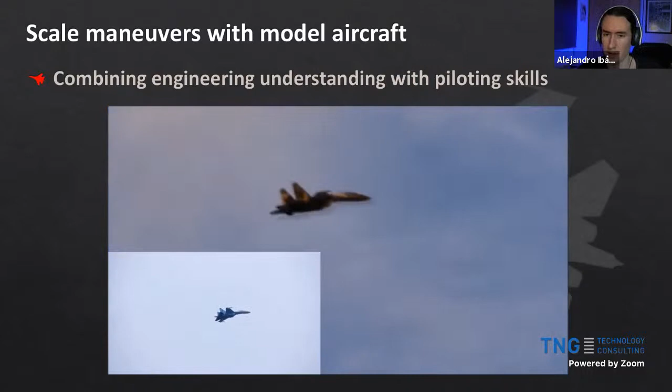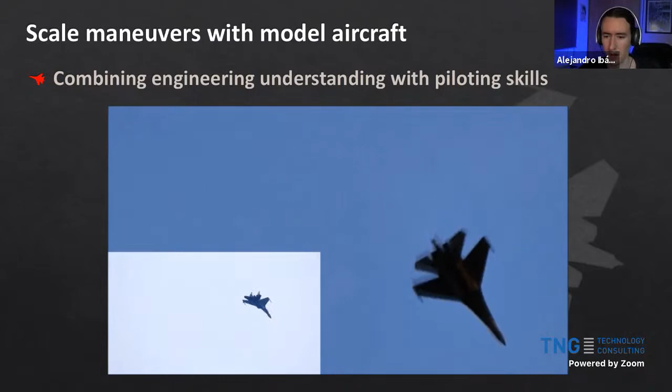So here, for example, you have in the small screen a video. Oh, by the way, all the media that you will be seeing in this presentation is taken from my YouTube channel or from my personal picture collections. So it's all filmed by myself or by my father. And what you're seeing here, this is my model aircraft, a small replica of the Su-35 on the big screen. And on the small screen, you have the real jet. And as you can see, they can be made to behave very similarly. Of course, there are some differences, and you need to slow down the footage of the model aircraft so that it looks realistic. But ultimately, they are more alike to each other than most people would think.

So what is the aim, what I really look forward to achieve in the talk today? So many of you may have already been to an air show, or at least you have seen fighter aircraft in movies or YouTube videos. But I think it really takes personally getting to an air show to experience this first person, to stand next to one of these machines, to really get amazed with it. And I would love in the future, if you attend such a show, or you see maybe the Top Gun movie that is coming up, you will see what these planes are doing, and not just be visually amazed, but also get a basic understanding of what is going on behind all this.

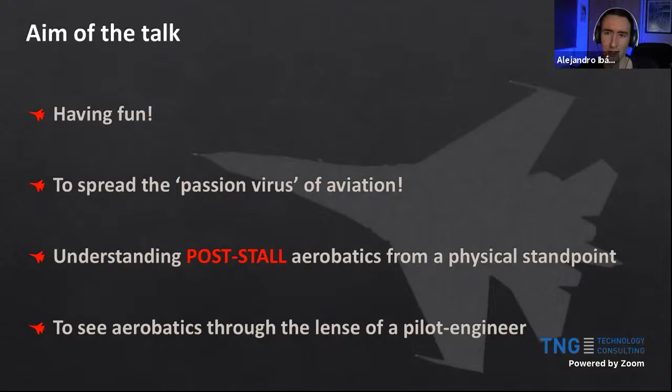And of course, let's have fun. And I want to spread the virus of passion for aviation. That's what this is all about for me.

And in order to achieve this, I have divided the talk in 3 main blocks. That is an introduction or background, in which I will explain how I came to be fascinated by this topic, and a brief discussion on the tools that we were taught at university in order to understand flight. Then we will move on to fundamental concepts that I think are necessary to understand the topic at hand.

And finally, the fun part, which is I've made a selection of very iconic extreme jet maneuvers, and we will be dissecting those. Then I'll make a few last remarks and move on to the Q&A.

And before we move on, first of all, I need to talk about what is a stall, because the title for the talk is Extreme Jet Aerobatics. But by extreme jet aerobatics, what I really mean is post-stall aerobatics. That is

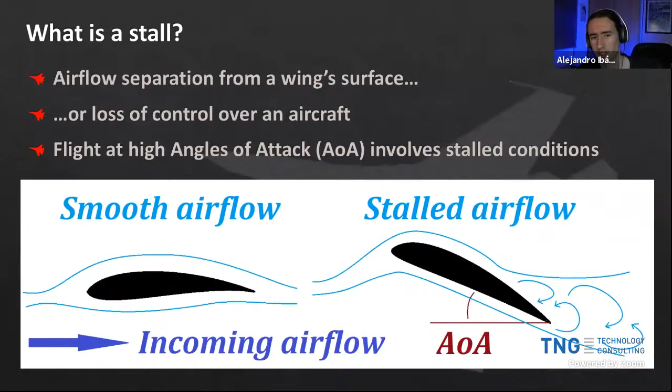a streamlined object moving through a fluid usually produces a very smooth flow. But as this object starts developing angle of attack, or alpha, as it's usually referred to in engineering, the flow has problems trying to keep attached to the surface of the object, and eventually it will detach. When airflow detaches from a surface, it creates all sorts of chaotic, swirly motions that, for the most part, one tries to avoid. And we will see why is that. So this is what stall is, and why is that relevant?

Well, post-stall aerobatics, as the name indicates, happen in post-stall regime, and most of the things that we are taught at university stop when stall begins. So all this talk essentially is going beyond university teachings in many regards.

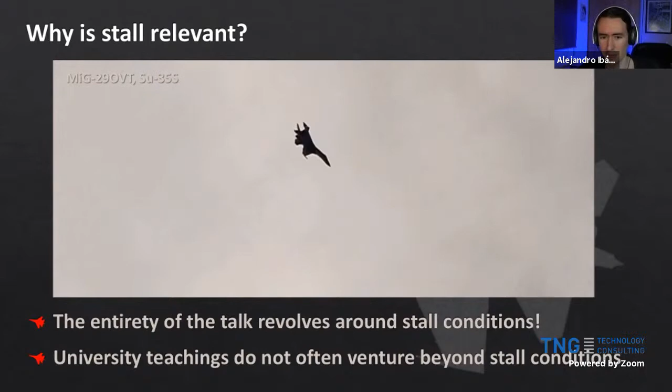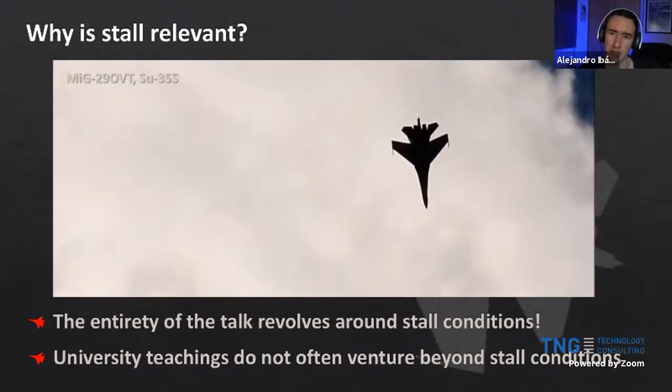Here you are seeing aircraft that are performing maneuvers in which the flow is practically entirely detached, but still these aircraft are able to retain control authority and keep flying. And without further ado, let's get started with the first block.

And I've titled this From YouTube to Engineering, and the title may sound a little bit weird to you, but it makes perfect sense. I mean, I was already playing with toys like small airplanes. Later on, I would go to video games on fighter jets as a child. But at that time, I was not really interested so much in aviation.

What really sparked my interest was when, as a teenager, I discovered videos of Russian aircraft performing seemingly impossible maneuvers on YouTube. That's where it all began for me. That's what really marked the difference from being just something that I knew about to being something that somehow I wanted to dedicate the rest of my life to.

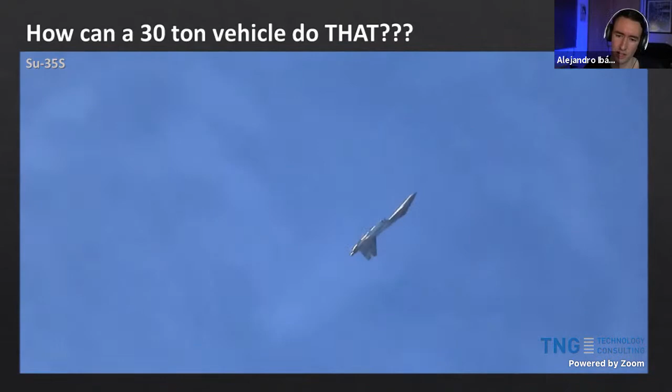Like, really, just look at what you are seeing here and try to wrap your mind around how such a huge aircraft is able to perform these kinds of maneuvers. Like, these jets are often in the 20 to 35 tons range.

Just so you get an idea, it's like taking 3 city buses, wrapping them together with duct tape, and then imagine these duct tape buses performing backflips at 400 kilometers per hour, plunging through the skies. Like, try to wrap your mind around that. I don't know about you, but for me, this is fascinating.

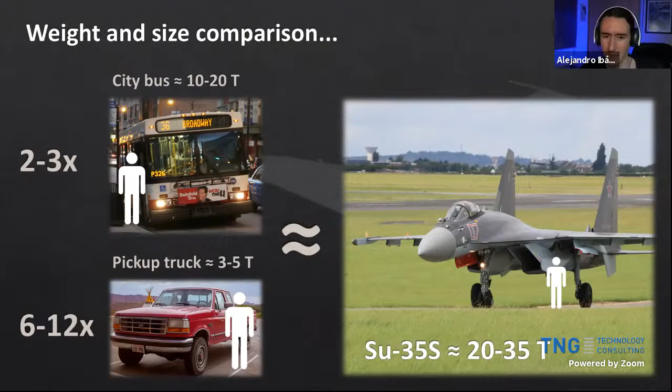Which leads us to university. This became such a passion, or even you might say an obsession, that I needed to know more about it. And I decided to enter an aerospace engineering degree in order to find out more. So actually, in fact, I was not able to enter an aerospace engineering degree directly because my qualifications were not high enough.

So I instead started with industrial engineering. I then repeated the access tests, and then I managed high enough qualifications to be allowed in. So, hey, I'm in. Now I will get the tools to get the answers that I have been craving for, right?

Well, not quite. I mean, I was expecting university to be hard, but I was also expecting university to deliver much more straightforward answers. They certainly delivered me many tools, but the answers as such to the questions that I was asking myself, they did not come forward as easily. Individuals that are knowledgeable on this topic are really hard to come by.

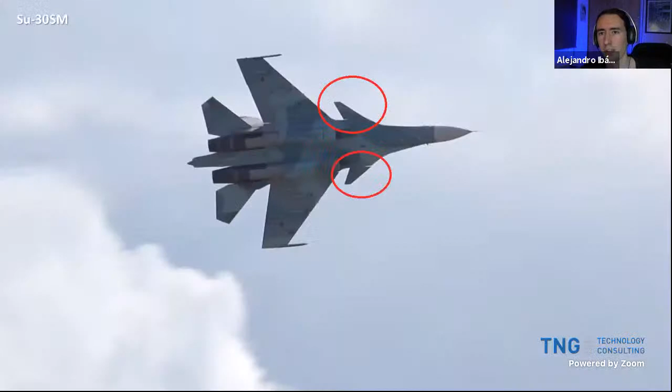The subjects didn't touch very much on these aspects in a deep way, and professors, for the most part, lacked answers. They were very knowledgeable, of course, in their respective fields, but many of the questions that I would ask them, they would just have no answers for.

Here, for example, we're seeing the Su-30 SM. This is a Russian airplane, and you can see highlighted in red are what are called canards. And I saw many planes use this, many didn't.

And one of my questions was, well, what are these for? I mean, I more or less get an idea of what they can be doing, but why would you mount them on some aircraft and then not on some other?

And I asked this to my aerodynamics teacher, and with all honesty, credit where credit's due, he just told me, I don't know, because he could have made anything up, and maybe I would have been okay with that. But since he did not give me an answer, that kicked me on my own spiral of research to find out more about the topic, which eventually I think led me to a deeper understanding on the subject.

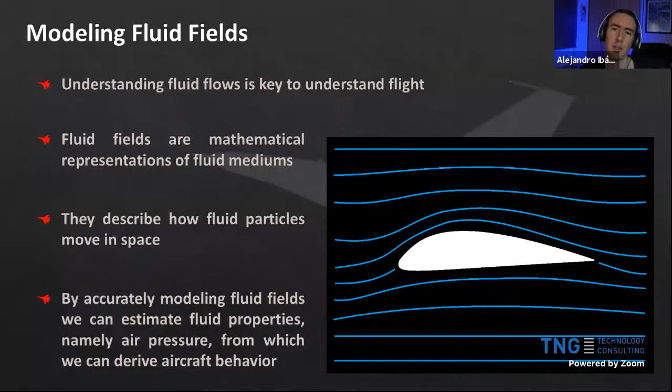So this is all about modeling fluid fields as far as the university part is concerned, right? If we want to understand how an aircraft is flying through the air, we need to understand how the air behaves around the aircraft. And from being able to accurately model the behavior of fluids, we can derive properties such as velocity and pressure, which will give us clues as to why things are happening.

And there are three main tools that we are either taught or at least presented during university. The first one would be potential flow. This is what is understood as classical aerodynamics, pretty much developed in the 1920s, but still relevant today. And this is an analytical method, heavily based on mathematics.

Then we have computational fluid dynamics, very commonly known as CFD, which more or less was developed about the same time, at least the foundations, but it only became readily available for use later on because we did not have enough computation power back in the day to make use of this tool. And finally, we have empirical research, that is to make a scale replica of what you are trying to research and test it in a wind tunnel or by other equivalent means.

Now, so what is potential flow? Here, I would like to make a comparison that for many physicists and engineers is very relatable. We are taught that you can represent any sort of wave through superposition of simpler waves, like sine waves. This is what is called the Fourier transform. And this is extremely useful, right? Well, for potential flow, there is a very similar thing going on. You can take simplified and elementary flows, and you can put them together and represent more complex fluid fields.

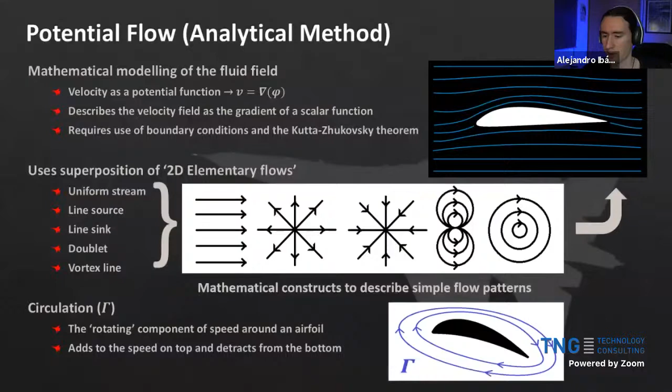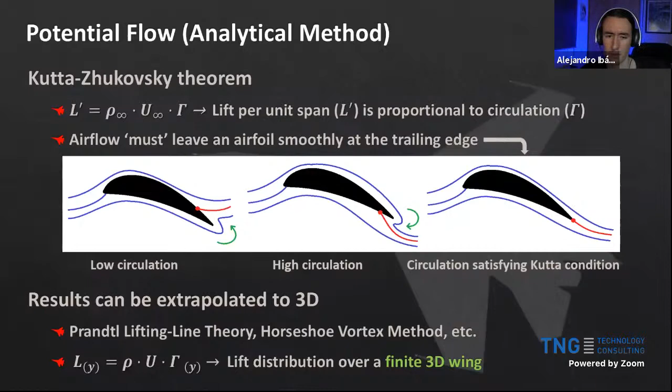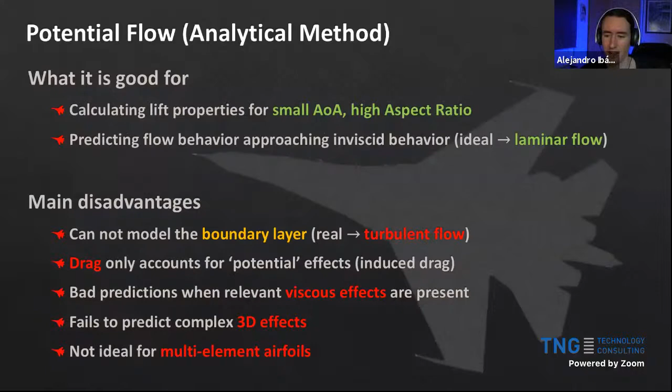You could virtually represent pretty much any fluid field around an airfoil. But you need to start specifying conditions so that it's not just an arbitrary result, but one that approaches reality. This is what is called the Kutta condition. And basically what you need to understand is that it forces the fluid to exit smoothly at the trailing edge of the airfoil. Then all this can be extrapolated to 3D through further methods like Prandtl lifting-line theory and others. So potential flow is fantastic for study of wings at small angles of attack, but again, we are going to be using really huge angles of attack in extreme aerobatics, so really not useful in that regard.

Which brings us to the next one, which is CFD. This is a numerical method based on the Navier-Stokes equations. That is essentially Newton's second law applied in a fluid context. What you do here is you discretize space in a number of control volumes, and then you try to solve these equations that describe the behavior of fluids for each one of those control volumes. And there are different numeric approaches to solve this.

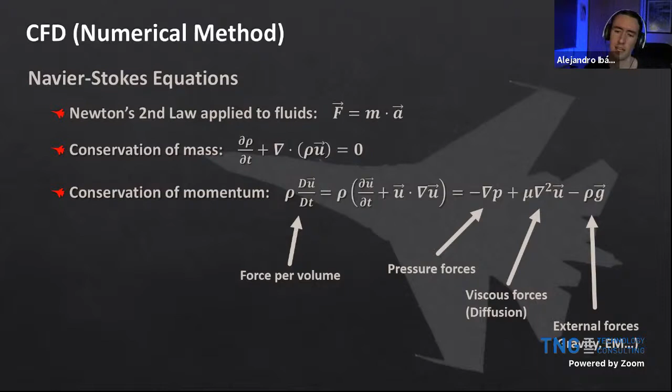But the thing is, the Navier-Stokes equations are some of the most relevant equations from the 19th century. And essentially, as I said, it's Newton's second law, force equals mass times acceleration. And when applied in the context of a fluid field, you have this force per unit volume essentially broken down into pressure forces, forces of viscous origin, and external forces like from gravity or electromagnetism. And once you simplify these equations for the case that would apply to an aircraft, that is an aircraft flying at subsonic speeds, for example, this is incompressible flow, so density remains constant.

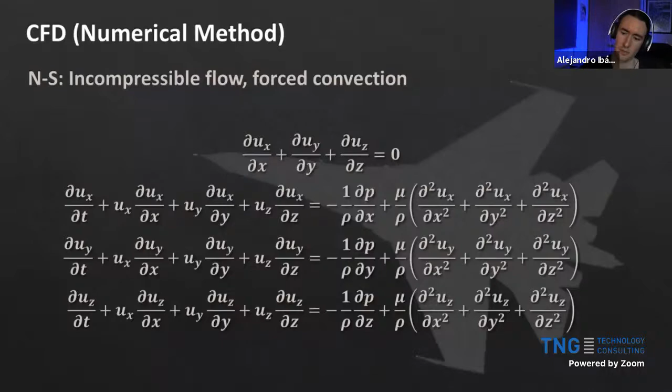And other simplifications, you still are left with a set of pretty heavy partial differential equations, which is what you can see now on the screen. And of course, you do not have an analytical solution for those, but you can make numerical approximations. That's why this is a numerical method.

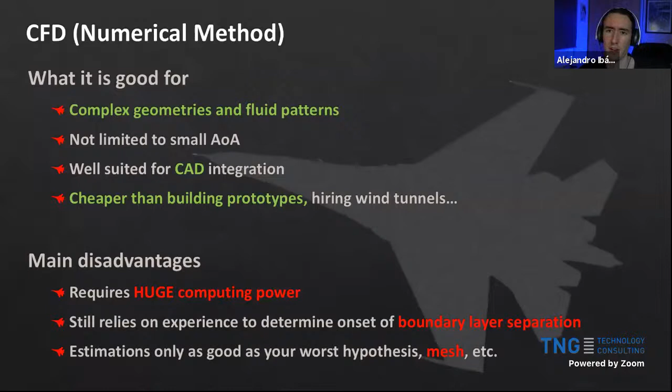CFD allows us to tackle much more complex problems, so to speak, but it requires huge computing power, which is one of the drawbacks, but it also is still difficult to tackle the problem of boundary layer separation. That is when stall happens. You need to contrast your CFD results with those of empirical research in order to really have accurate predictions,

which leads us to the last one, which would be empirical research, which would be really the best tool we still have nowadays to understand fluid motions. But it's crazy expensive. The installations you need for a serious wind tunnel are huge. These are huge buildings. It's not something you will build in your room. And even then there are drawbacks.

You need to take things into account, like you can scale down a model, but you cannot scale down air molecules. So you need to apply some correction factors so that what you're witnessing at a smaller scale will apply also to the larger one. And also model aircraft can be used in that regard.

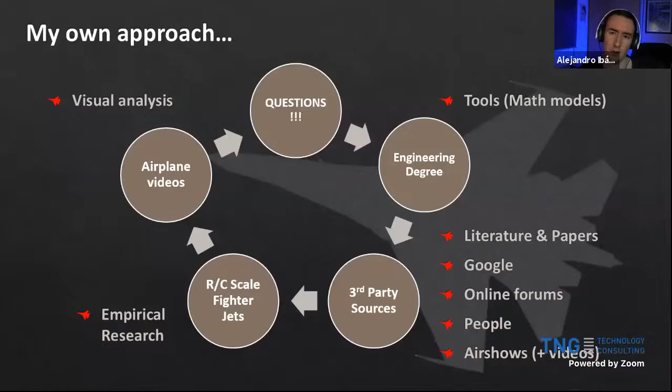So in essence, I had a lot of questions. I entered an engineering degree, which gave me tools, but for the most part did not answer those questions. And I went to third-party sources. I researched scientific papers, literature. I went to people that knew something on the topic, online forums. Then I was able to experiment with my own fighter jet model aircraft. And through analysis of videos, both of my jets and of the full-scale ones, I was able to learn a lot. And here I will start the second block, which is fundamental concepts.

First and foremost, you need to understand what each axis is called, because I will be mentioning this quite a few times. So yaw is like the steering wheel on your car, when you go to the left and right, this is what is called yaw on an aircraft. Then you have pitch, which would be to nose up or nose down, pitch up, pitch down. And roll would be balancing around your longitudinal axis.

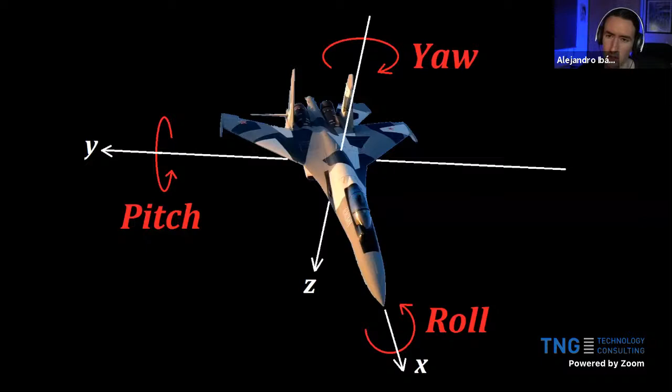And here, let me get back to airfoils and fluid fields, because it's interesting to note that we are not going to talk supersonics. Supersonics are a whole different topic, and when a fighter aircraft is performing the maneuvers that I have been showing here, it's not flying at supersonic speeds, because pulling those maneuvers at those speeds, the pilot would die and the plane would blow into pieces. It just does not happen.

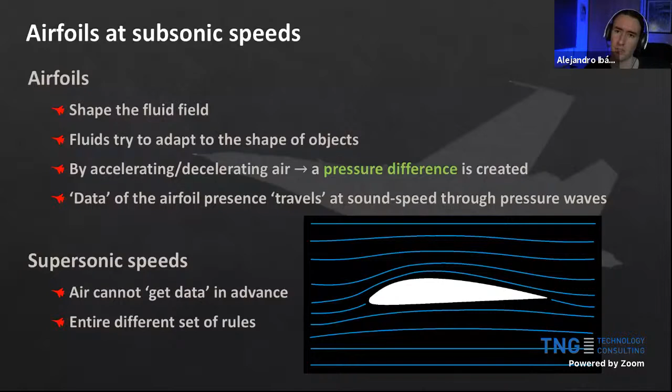So we will focus on subsonic, and at subsonic speeds, you need to think of airfoils moving through air as warning air in advance. So the air knows that an airfoil is coming before the airfoil gets there. A way to think of this is that the presence of the airfoil, this data is traveling through pressure waves, just like our voice would do at sound speed.

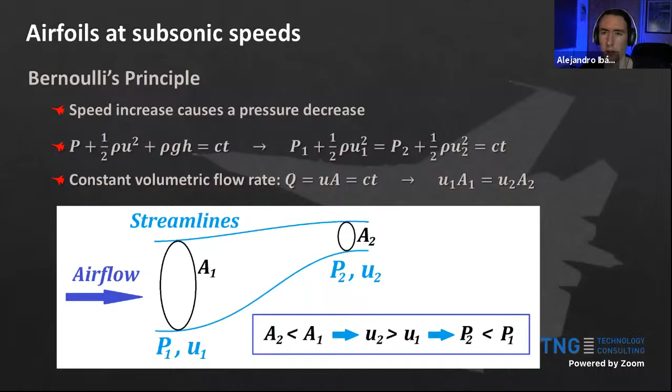And to understand how lift is produced, we have Bernoulli's principle, but long story short, what you need to take from here is that as long as the fluid behaves in a smooth and streamlined way, basically the fluid particles are moving along the streamlines parallel to them. So a constriction in area produces an increase in speed, and an increase in speed through Bernoulli's principle brings a decrease in pressure. So this is what dictates the distribution of pressure around an airfoil, and all the aerodynamic forces result from this.

Then we need to talk about what boundary layer is. Real airflow is viscous, so the air has some viscosity to it, and it is sticky. It wants to stick to things. So when you have a body moving through space, air is trying to attach to its surface. Or if we see it from a fixed perspective, like you would, for example, in a wind tunnel, the airfoil is fixed and airflow is moving around.

You can see that the airflow has an energy because it's the one moving, and then it loses that energy through viscosity and shear stress as it approaches the surface. And the space where this is happening and the fluid is losing speed is what is called the boundary layer.

And once the boundary layer loses enough energy, a phenomenon can happen, which is flow reversal. Fluid likes to travel from high pressure to low pressure zones. You probably know this from weather forecasts, right? Well, in an airfoil, sort of the same happens.

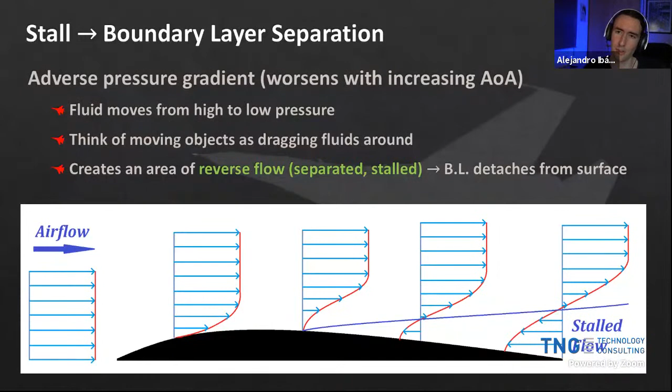So as the airflow moves along the airfoil towards the trailing edge, the pressure has increased. If it has increased high enough, then the flow will reverse and start flowing from the trailing edge to the front of the airfoil, and this causes the airflow to separate. This is essentially stall, and it gets worse as the plane increases angle of attack.

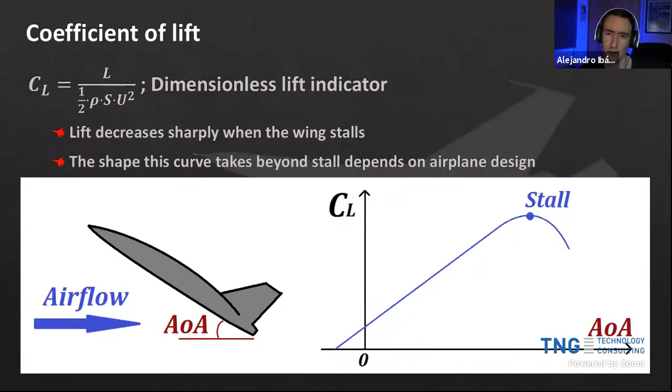So here you see coefficient of lift, which is directly proportional to the lift that an aircraft generates. For the first angles, this increases linearly, but then when stall happens, it drops sharply, and you stop producing lift, which would be the component of force that is perpendicular to airflow, the one that keeps you flying, essentially.

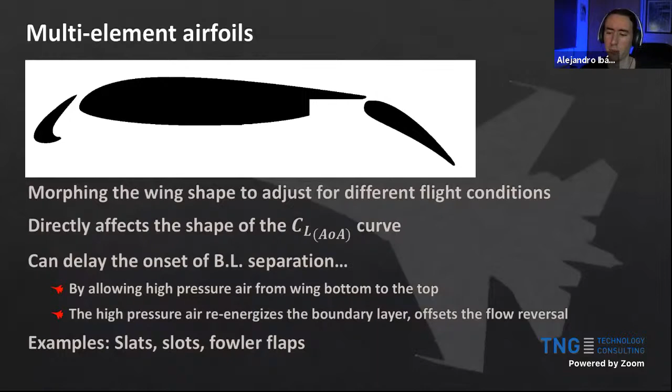There are many ways in which an airfoil can shape and form in order to try to improve this and delay stall. One typical thing that airplanes do is to allow high pressure air from the underside of the wing to the top by making gaps. What this does is you are infusing fluid that has high energy from the high pressure into the part of the airflow where it's starting to slow down, and then you give it a little more speed and can delay stall.

And a quick note, so far I have been talking about stall as a separation of fluid, but from a pilot's perspective, you need to also understand stall as a loss of control over an aircraft. The two conditions are often related, but they are not exactly the same. You can have an airplane that has separated flow, but has not yet reached the point where the pilot lacks complete control over it. And this leads us to how airplanes are controlled.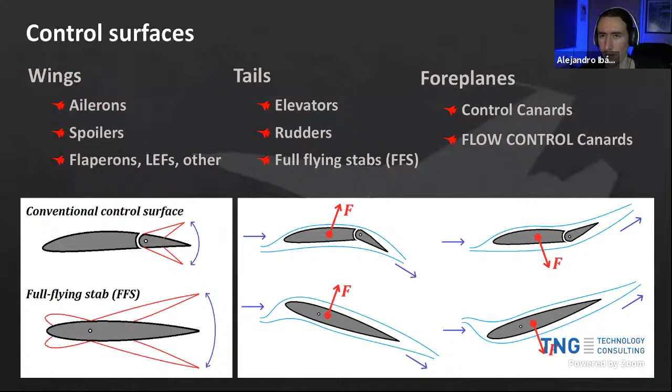So essentially the airfoils can often move. On the bottom left corner, you can see a conventional control surface, that is, the airfoil is fixed and the trailing edge can deflect up and down to change the pressure field and the forces that are generated. Immediately below, you have a full flying stab, that is, the whole airfoil will pivot around an axis. One way or the other, you're redirecting flow upwards or downwards. So mass times velocity, you are changing the momentum of airflow, and by reaction, the air is also conveying momentum to the aircraft in the opposite direction, so to speak.

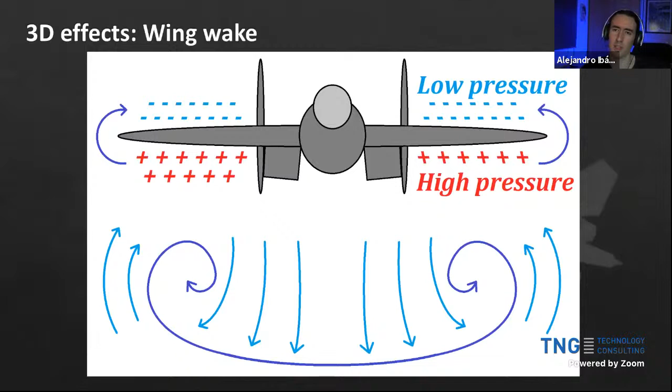Right underneath, you can see the typical shape that the wake of an airplane takes. It is very easy to remember, because it's a happy face, right? It's a smiley. You have two eyes, which are the vortices, and a smile. From this, you can easily picture what is happening to the airflow. It's going up on the outward portions where there is no longer aircraft, and on the inside, it's going down. This is very, very relevant.

Here, for example, you're seeing one of my model aircraft of a JAS 39 Gripen, and I have attached smoke cartridges to the wingtips to see these patterns being formed. And you can sort of see that happy face in there.

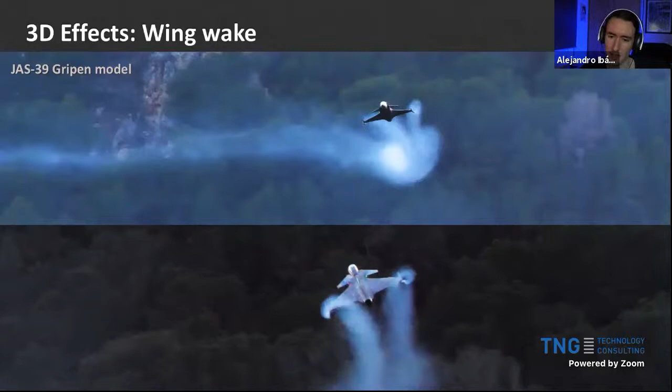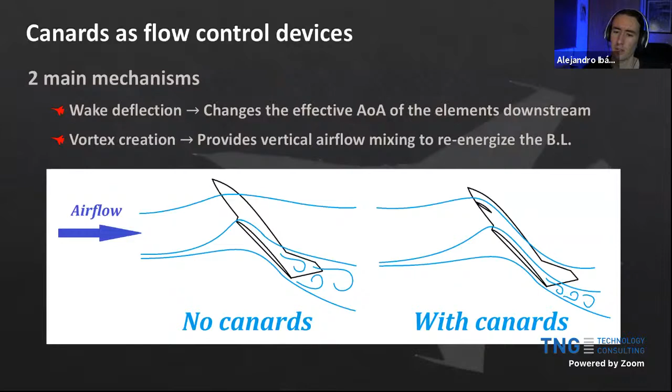And this is important because you can use canards. Going back to what I was explaining first, what are canards for? On an aircraft that does not have these canards, the stall will begin sooner as you increase angle of attack. But adding canards is akin to using a small wing ahead of your bigger wing.

And by doing this, you are doing two things. You are deflecting the wake, so the canards are changing the effective angle of attack that the main wings see. So the main wings suddenly do not see the airflow as coming from straight ahead, but with a shallower angle. So this already helps in delaying the onset of stall.

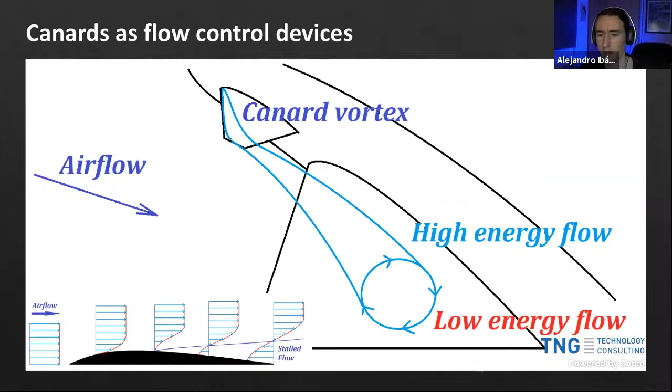So if you induce a circular motion here, you can bring that airflow that has a lot of speed in contact with the surface. So you are, again, putting energy where energy is bleeding off, and allow these airplanes to perform better.

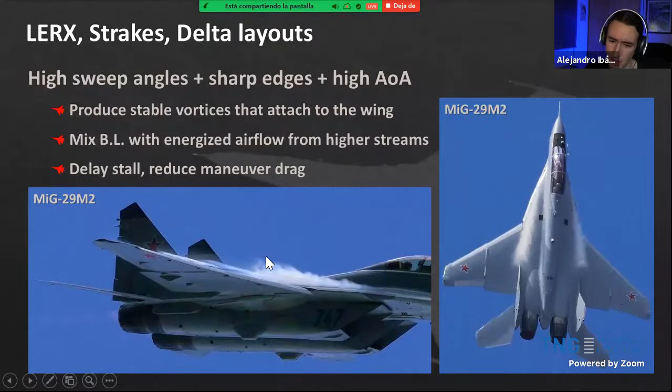Now that we are getting into the thick of it, it's interesting to understand what happens when you do not have a streamlined object, but a blunt one, like a cylinder or a plank. Airflow no longer behaves smoothly because airflow has a problem keeping its pace around sharp corners. So vortices will shed, and the airflow will detach from the surface.

And as we have seen, this can be put to good use to improve the lifting conditions of an airfoil. But for a cylinder in particular, you can have these vortices interact with each other in a periodic fashion. And this leads to oscillations and vibrations, which is something you definitely do not want on an aircraft because it can be destabilizing. And a plank pretty much behaves in the same way.

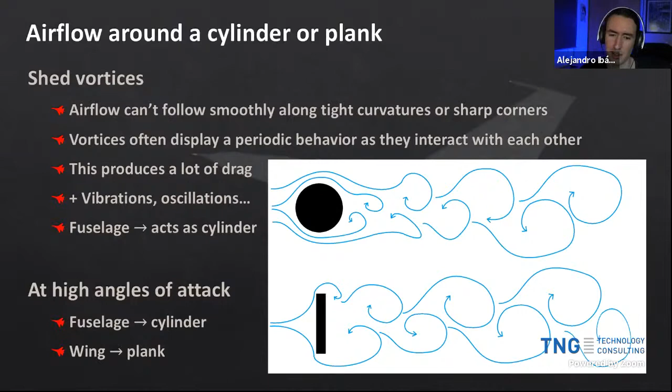And another thing that I want you to understand is that as a plane speeds up, it requires little angle of attack to produce lift. And the slower it flies, the more angle of attack it needs to produce the same lift.

And now is where the fun part really begins, which is modeling flight dynamics. At university, we are often taught about the 4 basic forces of flight, that is thrust, pushing you onwards, drag, the aerodynamic drag that is holding you back, the lift that will allow you to fly in the air. And then you break this down into even more complex systems, like you will break down lift into the lift of the tail on one end and the lift of the wing on another. You will also do this as a lift plus a torque applied to them.

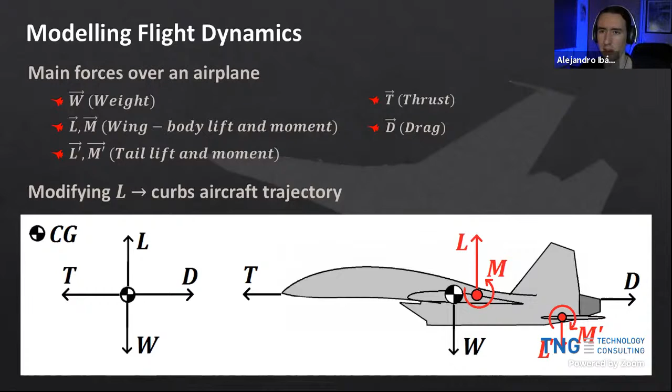And this is fantastic for modeling things mathematically because you can make a bunch of simplifications. But this is not visual, so this is not what I'm going to do here. Instead, I want you to picture forces around the aircraft in a different way. I want you to see that basically, ignoring thrust, we have just two main forces, that is gravity forces and

aerodynamic forces. Gravity forces, by definition, act on the center of mass of an airplane, so they cannot cause rotation over the body. I mean, in space, there's such a thing as tidal locking, but that's way out of the scope and pretty much not applicable to atmospheric aircraft. So forget about that. Gravity forces will not cause an airplane to rotate by themselves.

What makes an airplane able to rotate is the distribution of pressure, which we can take as a resultant force, which here I have painted as F, applied on a center of pressure. So if the center of pressure coincides with the center of mass of the aircraft, then there's no torque being exerted and the airplane will fly straight.

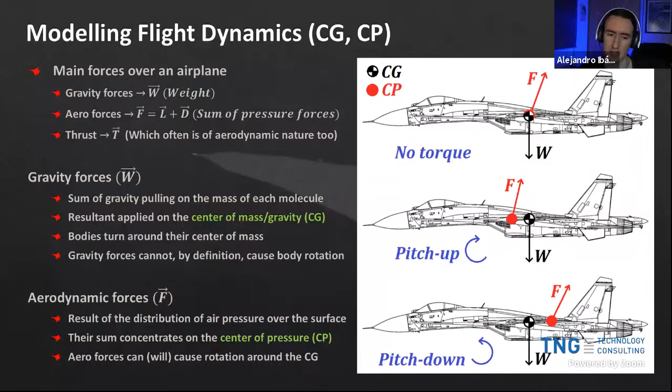If the center of pressure is shifting forward of the center of gravity, then the plane is going to pitch up, and conversely, if it shifts aft, the plane is going to pitch down, right? Force times distance exerts a torque, and the body will rotate around its center of mass. So with this in mind, it's much easier to begin to understand how these aircraft performing extreme maneuvers behave the way they do.

And I don't know if this picture I made here is really easy to understand, but I will try my best. So here you're looking at an aircraft with like a 45 degrees angle of attack that is coming straight at you. And you have the center of gravity, which is always at the same point. And what is happening is that this aircraft is deflecting its control surfaces. Like in this case, it would be canards on the front and tail planes on the aft.

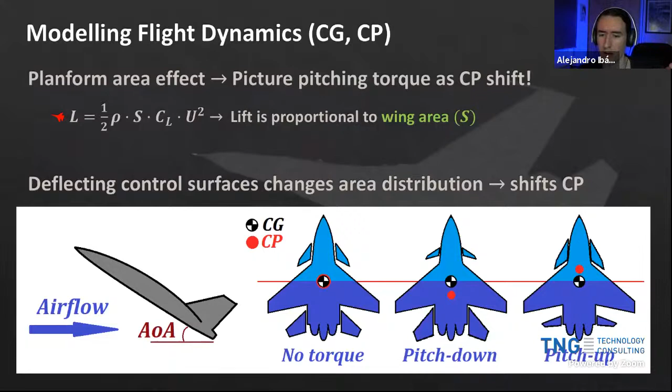And there's many things that affect lift, but surface is one of them. And you can picture a plane when it's reaching extreme high angles of attack. When you are deflecting control surfaces, what you are essentially doing is changing the amount of area ahead and behind the center of mass. So by making more or less area, you are moving the center of pressure. And as we talked earlier, shifting center of pressure means we can steer the aircraft around, like making it go up, making it go down.

And so far, I have thought about controlling the aircraft with conventional controls, but to understand extreme aerobatics and post-stall maneuvers, we need to talk about thrust vectoring. So even before thrust vectoring, understand that thrust is a force, so it will act on a line. And if this line intersects with the center of mass of an aircraft, essentially the plane is going to fly straight. If it does not, then it is also causing a torque that needs to be compensated.

And some aircraft engineers were smart enough to see that, oh, well, actually, we could use this to our advantage, because when a plane stops flying at speed, we lack the ability to control this airplane with enough authority from conventional controls. So instead, you can move thrust around, like pointing the direction of the thrust vector, hence thrust vectoring, to cause a torque that is allowing you to move the aircraft. And in the video, you saw a Su-30SM that is pushing up and down on the stick, and you can see how the nozzles are moving in addition to the tail planes.

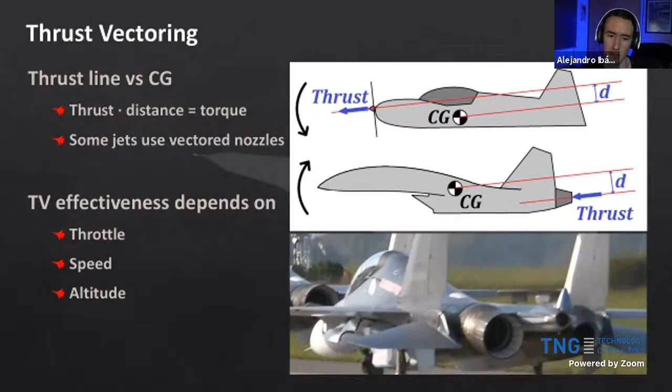This is a close-up of what nozzles such as in a Su-30SM aircraft look like when inspected close-up. You can see that they can deflect quite a bit. And there are many types of nozzles. Essentially, you have one-dimensional nozzles where they will go up and down. Then you have two-dimensional nozzles where they go up, down, left, and right.

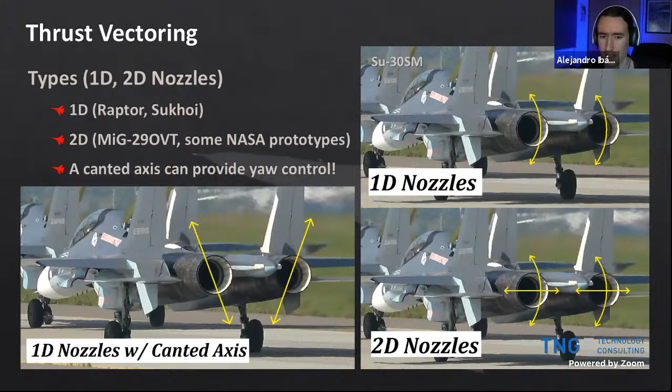So on typical two-engine aircraft configurations with 1D nozzles, that is the top right picture, this allows you to have pitch and roll control over the aircraft when you would otherwise be deprived of effective control. Then if you have 2D nozzles, you also have control over yaw. But Russians devised a very smart way to get rid of the second axis, which essentially means saving weight on the aircraft by removing actuators.

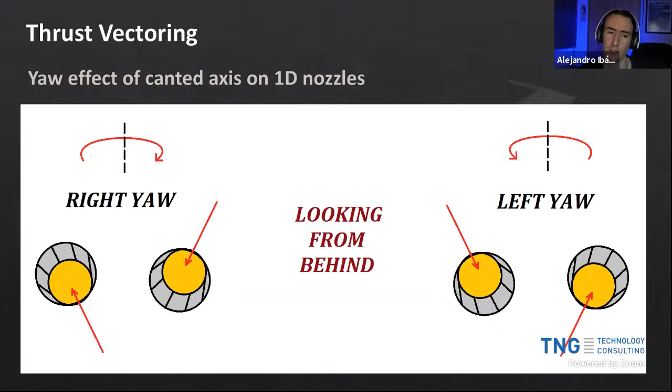And that is to tilt the axis at which one-dimensional nozzles actuate. So for example, if we break this down in forces, this would be like looking at an aircraft from behind, and the orange would depict the force that is being produced by said engine or nozzle, and this is broken down into two components, one vertical, one horizontal. The vertical is going to produce a roll moment, and the horizontal is going to produce a yawing moment. So you still get control over the three axes with help from flight computers.

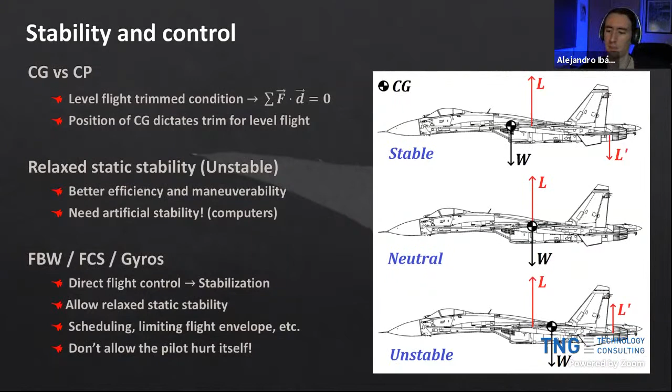And I am running short of time. So here I could talk about stability and control, which is also very relevant, but I'm going to skip it because we will not have time.

Let's start here the third block of the presentation, which is really what we were here for, which is to discuss extreme jet aerobatics. And the first one I want to talk about is sustained high alpha. So here you're seeing, again, a Su-30 SM. This one has the whole thing. It has canards, it has tailplanes, thrust vectoring, flaperons, rudders, and you were seeing it performing a sustained flyby at around 70 to 80 degrees angle of attack.

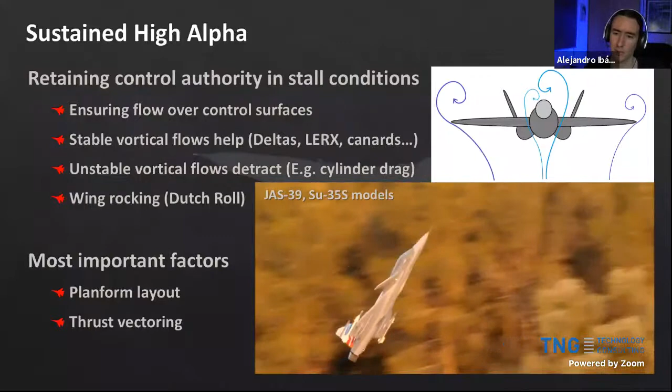Now, in this other video, this is me flying some of my model aircraft, replicating more or less the same moves. One thing that needs to be understood, this is a very difficult maneuver because, as we said, in these conditions, the airplane is starting to behave more like a plank and less like a streamlined object.

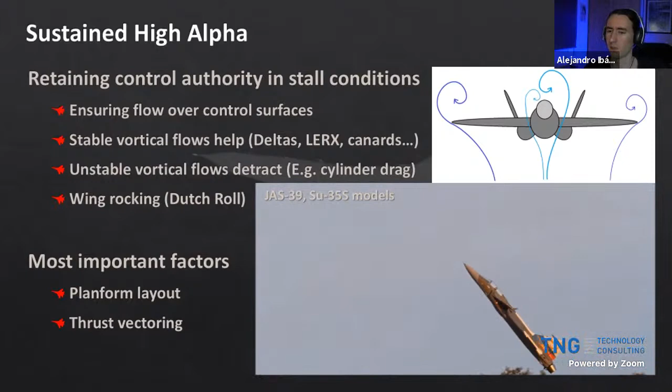And if you see the top right image here, you can see an airplane from above. And if it is flying, say, at 90 degrees angle of attack, completely perpendicular to the airflow, it's going to shed vortices. So the fuselage is like a cylinder, the wings and the rest of the aircraft are like a plank. And these vortices may not be shed in a homogeneous fashion, but they may alternate in strength. If you look closely here, you can see that my aircraft is tilting to one side and the other as a result of this.

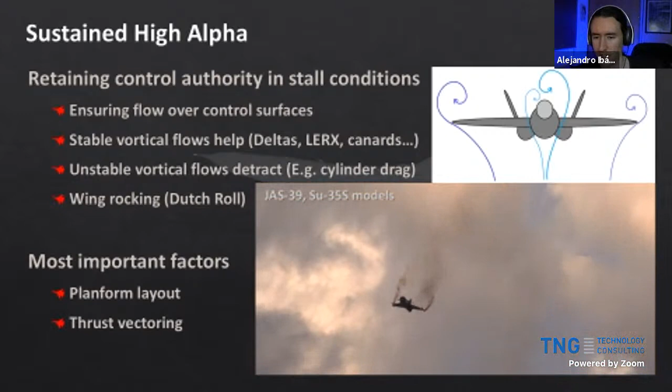There are a few more examples here that are pretty visual and make it easier to understand. So to be able to hold control of an aircraft in such conditions, you really need to try to ensure, here, one second, look here. Here you can see the vortices alternating between left and right, which is a problem that needs to be overcome.

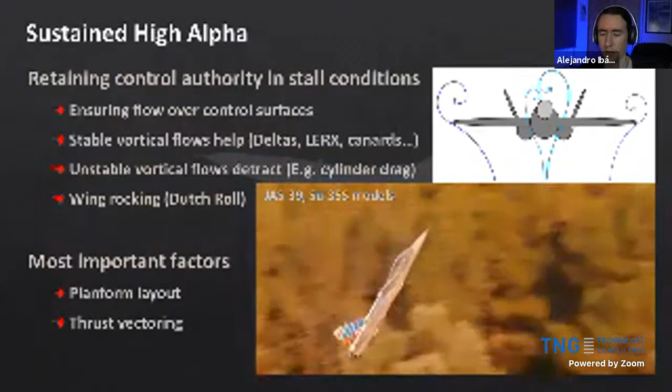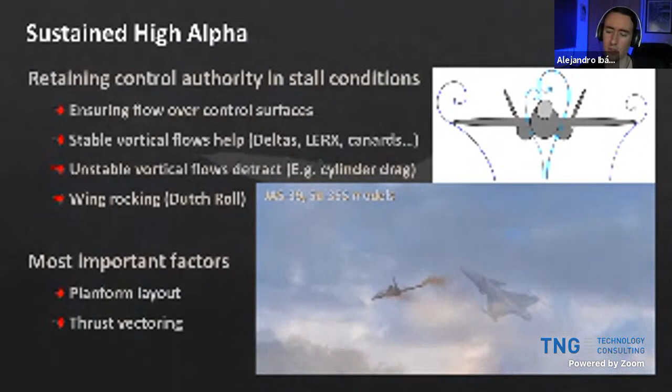And there's also what is called Dutch roll, which comes, we could say, from a potential origin, but it has much the same effect, and both can add up. And so here, thrust vectoring is pretty much the key solution to keep the plane in control, because control surfaces are almost deprived of authority.

And another maneuver, this is pretty much the first extreme aerobatic maneuver that one thinks about, which is the Cobra maneuver, or Pugachev's Cobra. So essentially the plane is flying straight, then it pulls sharply to 90 degrees of angle of attack or even farther, and then the nose comes back down. And through the entirety of it, the airplane retains forward motion. The previous video was a real MiG-29. These are my model aircraft. And as you can see, you can replicate the maneuvers of the big scale aircraft with smaller models.

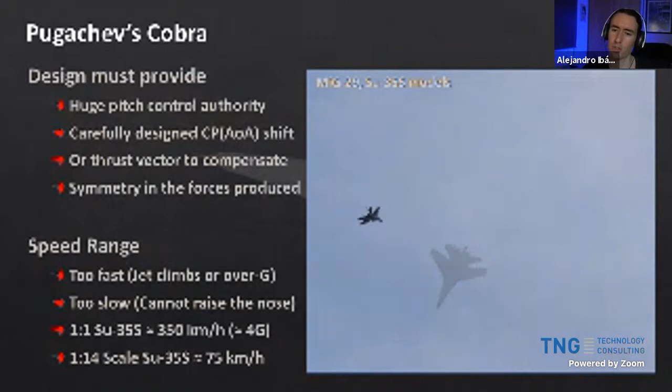This maneuver requires a very particular design, because you need to be able to shift the center of pressure with angle of attack, such that when the maneuver begins, it moves forward, but then as you reach extreme high angles of attack, it shifts back so that the nose can come back down again. So not all aircraft can properly perform this maneuver.

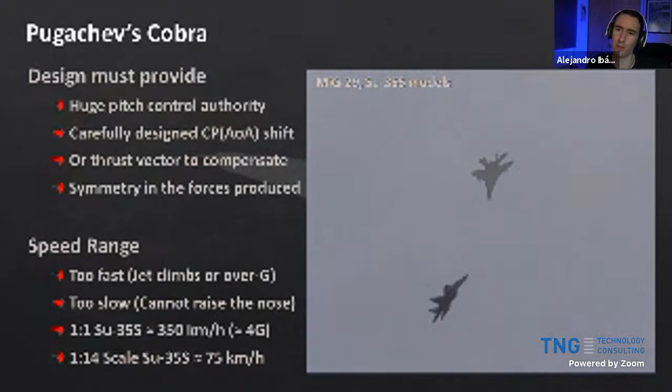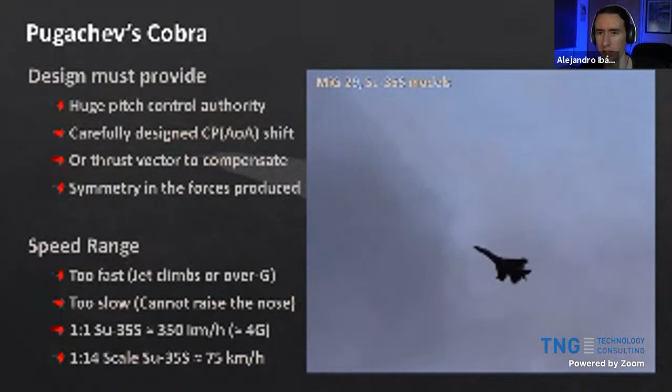And even if they can perform the maneuver, what is really tricky is to recover from it, because, okay, you can pull on the stick and the aircraft is going to rotate, but then you are left with no speed and you still want to exit forward, and you have no control over the aircraft. So again, thrust vectoring plays a great part, but with a very good design, you are capable of making this maneuver even without thrust vectoring.

Then we have Frolov's chakra, or the Kulbit, and this is like taking a Cobra to the next level. So you are pulling on the stick, but then you are not going back. You are completing an entire rotation. This maneuver is really mind-blowing.

Maybe you have tried flipping your cell phone and you have found that it's very difficult to flip your cell phone without it producing weird tumbles in the sky. Or maybe you are familiar with a viral video on the internet that spins a T-handle in space. And this rotation is not stable. It spins in one direction and then suddenly flips and keeps spinning in the other direction, then it flips again.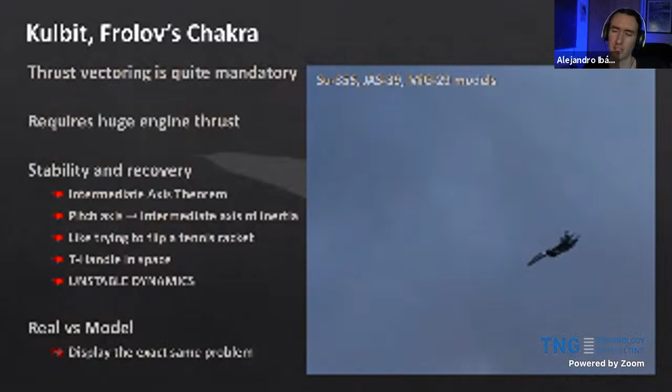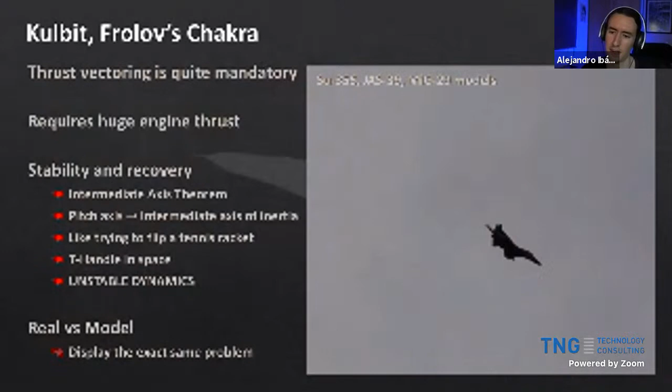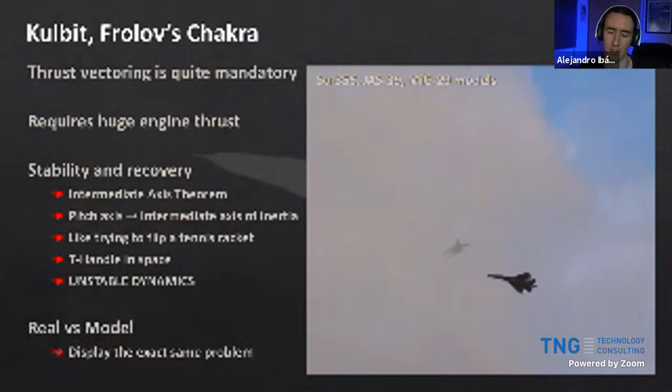Well, I will not go into details, but this happens because an object is spinning around its intermediate moment of inertia. So not the moment of maximum inertia, not the moment of minimum inertia, which produce stable rotations. And it just so happens that the pitching axis on a fighter aircraft is the intermediate moment of inertia. And if you mess up this maneuver, then the plane is going to fall out of the sky in a very weird fashion. I do not have video of this now here, but maybe if you're interested, you can ask me later and I can provide something privately.

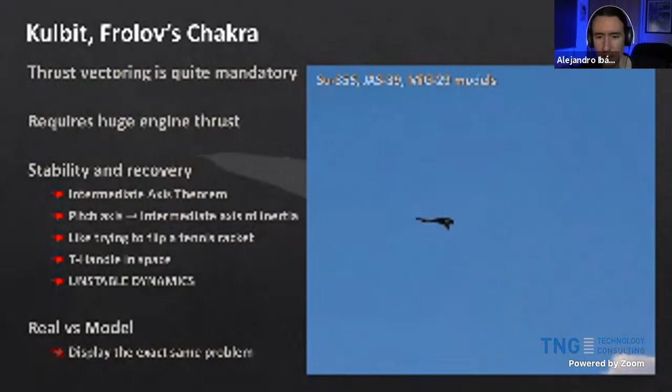Then we have flat spins. So right now we were seeing longitudinal maneuvers, and this is a lateral one. So essentially the aircraft is falling, it's plunging through the sky. And traditionally when an aircraft entered the flat spin, the first thing the pilot would do is eject, because most aircraft were not able to recover from flat spins. But nowadays, particularly with modern fighter aircraft, you are capable of putting the aircraft in this condition and coming out without any sort of problem. So thrust vectoring plays a part, but it can also be performed without the help of thrust vectoring.

Essentially, even without thrust vectoring, just with differential stabs that are painted blue and orange in this picture, you can do this. In the top half of the screen, you have the reactions on the stabs when a pilot produces a roll input on the aircraft. And that is one stab deflects up, the other deflects down, and this produces a torque, which is going to make you roll to the right in the case portrayed here.

And on the bottom half of the screen, now the plane is no longer flying aligned with airflow, but it is at 90 degrees, just as it would be more or less in a flat spin. And the exact same input, like pulling full roll to the left or to the right, will produce a yawing output in the opposite direction.

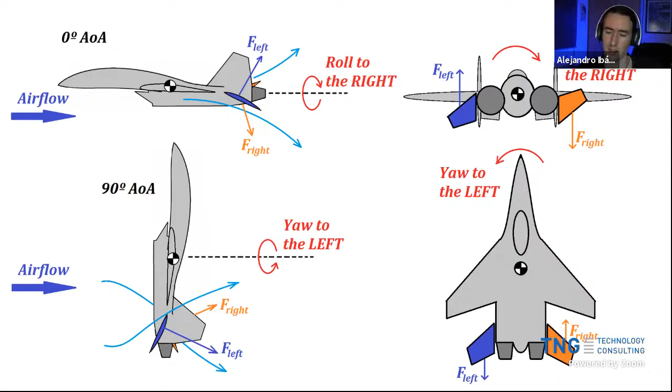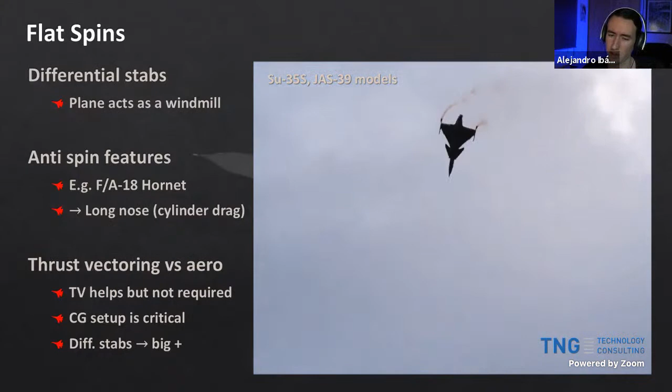So I will not get stuck here now, but you can come later and watch the replay of this and think about this, because here it may seem difficult, but it's really not, once you take 5 minutes to think about it. And again, I do this all the time with my model aircraft, most of the times even without using thrust vectoring. And it's a beautiful maneuver.

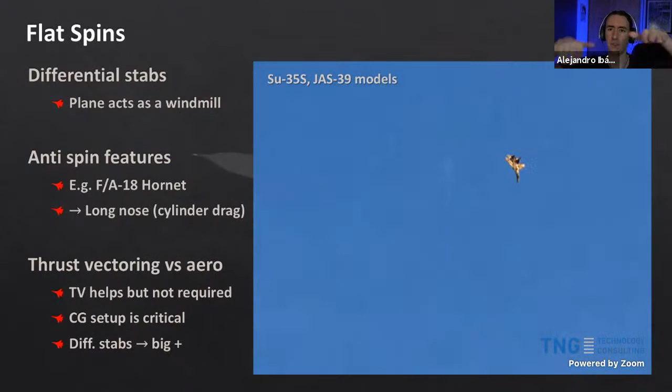And essentially what you're doing is you're making the aircraft behave as a windmill. So if these are your stabs, you're deploying each to one side or to the other. And at extreme angles of attack, this is going to cause a rotation to either side. And when you want to arrest that rotation, you provide the opposite input and the airplane is going to stop. There are some aircraft like the F-18 that do not do this well because they have built-in anti-spin design features.

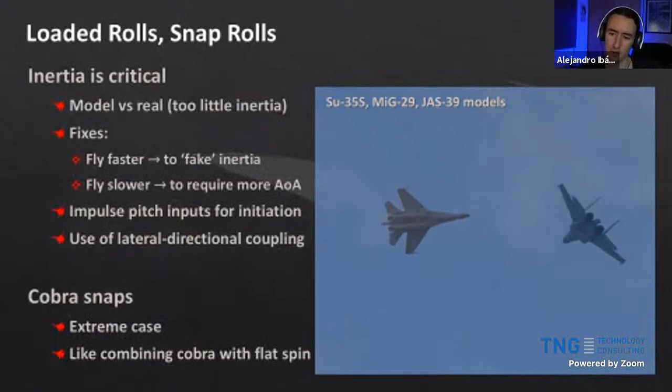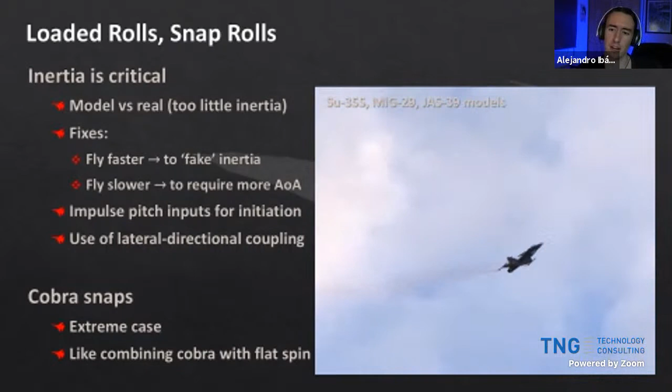This is amazing. And again, this can be replicated in all its multiple forms in model aircraft. But this one is trickier than the others to pull, because there's a huge difference in inertia between a small model aircraft and a large real jet, so to speak. I mean, they are all real, but you get the point. And in order to fix this, I either need to fly faster to kind of fake the inertia through kinetic energy, or conversely, I need to fly very slow so that the airplane needs to pull really huge angles of attack to produce the lift.

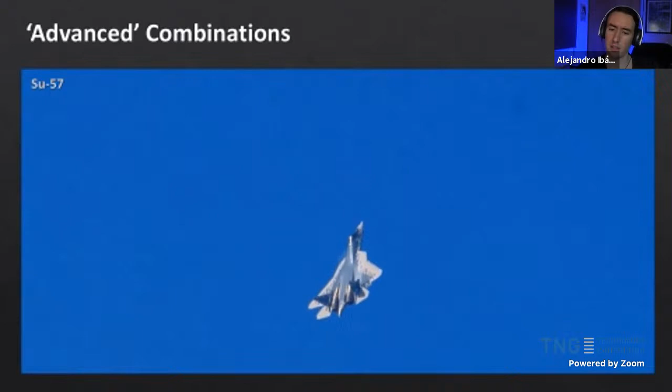And last of all, and I will be finishing here, we have extreme combinations. This is a Su-57, and here it is producing a yaw maneuver. This is in slow motion, but it's barely using the rudders at all. So the aircraft is producing this motion by differential drag. It's deploying all the control surfaces on one wing and keeping them pretty much flat on the other. And this creates a difference of drag between left and right, and is what can cause the aircraft to steer even in conditions where it would otherwise be deprived of control.

This is also a J-turn, also known as the Herbst maneuver. And it is used to very quickly reverse the direction of flight. This is also a very cool one.

And last, I want you to think about, before we wrap up, when fighter jets are flying at such extreme high angles of attack, you can pretty much think of them like a snow sled, you know, that thing kids go on the mountain when it has snowed and they go down the slopes. And you have like two brakes on each side, and you can pull on one, pull on the other, and then the sled will turn to one side or the other. So fighter jets, in these extreme conditions, you can deflect control surfaces in order to produce drag. And this drag will pretty much do the same effect as the brake would do on the snow sled.

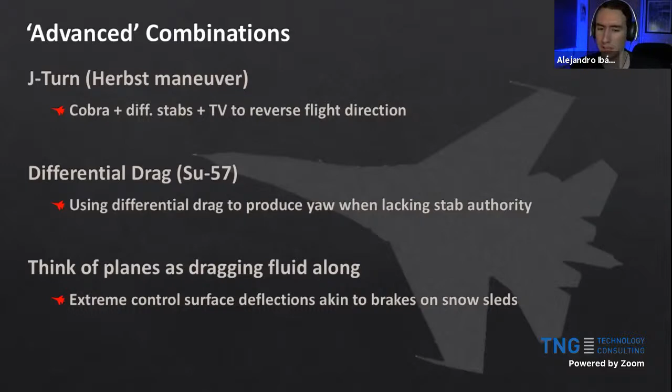Last remarks, I mean, aerobatics are super amazing. I hope this sparked interest in some of you, and you will research and look further into it. I hope that you enjoy the presentation. And as I put here in the bullet points, combining theory and practice is powerful, because when you love what you are doing, you are going to learn much more than otherwise.

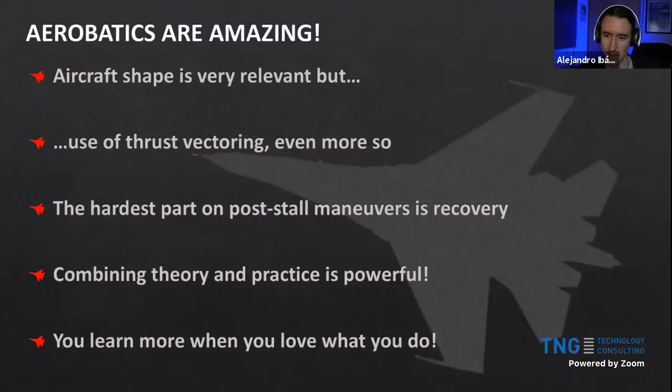And moving on to the questions and answers. So there we go. I will try and do my best to help you out, explaining everything that did not come across as good as I was planning to. Alejandro, thank you very much for the presentation. That was really amazing. We're going to collect questions, and since people have to move in 3 minutes to another room in Partenkirchen, I'm going to ask, do we have questions from the room, Partenkirchen in the Westin Grand? Let's start with that.

How many RC planes have you lost while learning these maneuvers? I love that question. A lot. Okay, a more specific reply maybe is in order. So I have been flying for 18 years, more or less. From those 18 years, I have performed around 3,000 flights, and about half of those flights, 1,500 flights, correspond to fighter jets or airplanes that have the shape of the fighter jet. And in total, I have had around 35 to 40 different models. Not all of them fighter jets, evidently. Fighter jets, I have mostly been playing with 4 to 6 main types of planes.